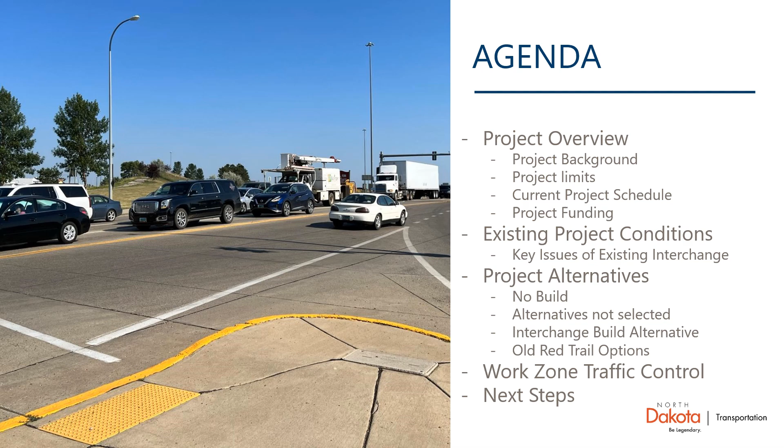Jason will then provide an overview of the alternatives for the interchange and the options for the intersection at Old Red Trail. This will be followed by a discussion of the work zone traffic control, which will highlight the impacts anticipated during construction. We will then conclude the presentation with discussion on next steps for the project and some information on how you can provide feedback and ask questions about the project. Now, beginning with the project overview.

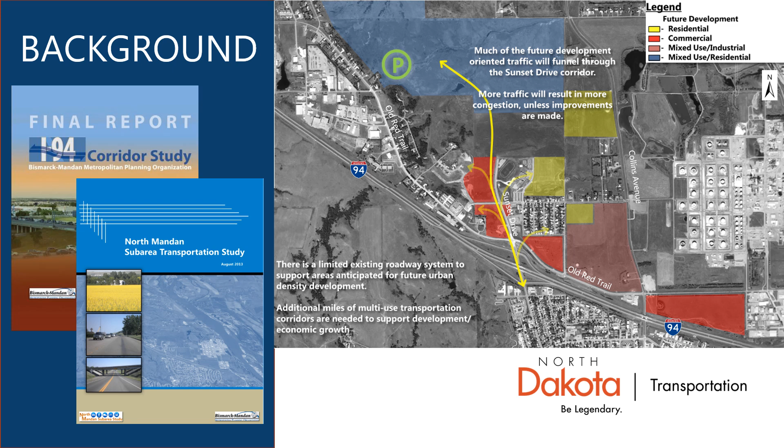Studies for this project began in 2013, when the Bismarck-Mandan Metropolitan Planning Organization completed a study of the area north of Interstate 94 in Mandan. The study found that a significant portion of new growth in Mandan would occur north of the Sunset Drive Interchange. The new growth would generate a large volume of new traffic that would funnel through the existing interchange. The report identified that modifications to the interchange would be needed within the next 5 to 15 years from when the study was completed to accommodate this new growth of traffic.

Now fast forward to the present. There has been quite a bit of growth along Sunset Drive and Old Red Trail, including a number of businesses. These include the Comfort Inn, the Medical Plaza, and the Walmart, just to name a few. Recently, the new Mandan High School has opened, creating more traffic in the area. There have also been several other developments reviewed by the city, both commercial and residential in nature, that will have an impact on the amount of traffic traveling through the interchange and how current users travel through the interchange day to day to reach these new destinations. It is this increase in traffic that contributes to the need for the project as identified in the original study.

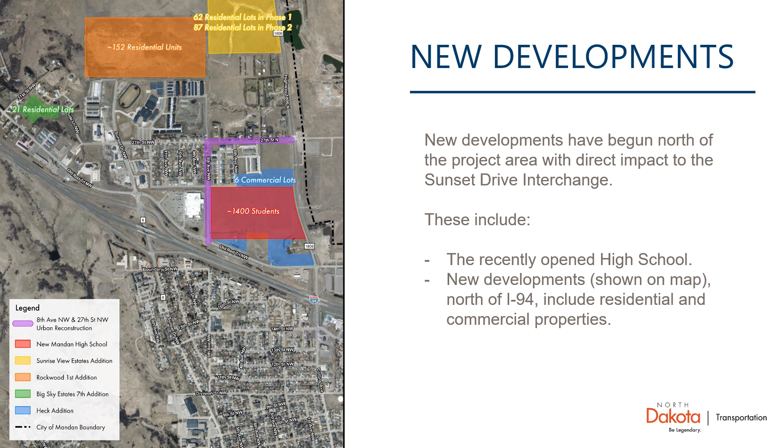The project limits for the project include Interstate 94, about 1 mile east and west of Sunset Drive. This starts at the scenic overlook along eastbound 94 located west of Sunset Drive and continues easterly to Highway 1806, the Collins Avenue overpass east of Sunset Drive. Along Sunset Drive itself, the project limits begin at 18th Street south of the interchange and continue north to the 27th Street intersection near the high school. The project will include the intersections of Boundary Street and Old Red Trail.

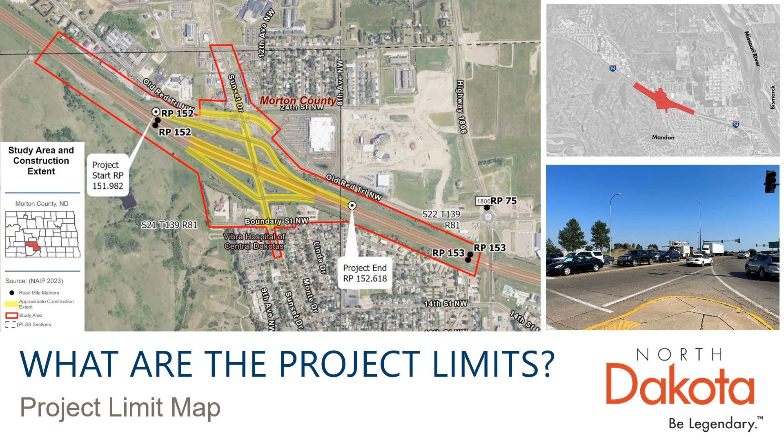Taking a look at the project schedule, we met a little over a year ago to present alternatives for the interchange. Following that meeting, the team prepared the findings of the feasibility study and held a management presentation with the North Dakota Department of Transportation and the City of Mandan in May of 2023. After the meeting, an interchange type was selected with input from the DOT and the city, and the two intersection options at Old Red Trail were both advanced for further evaluation. We are here with our second public input meeting to get more input from the public on those intersection alternatives.

After the comment period for the meeting closes, we will be reviewing the public input, making refinements to those intersection alternatives, and completing the environmental document with the selection of the intersection type at Old Red Trail. The design team will then complete preliminary engineering and move into final engineering, which will run through 2025. Utility relocations may begin ahead of construction, and construction of the interchange could begin in 2027 at the earliest.

The project funding will be split for this project. For construction that falls within state and federal right-of-way, which encompasses the interstate and interchange, the project cost will be split as 90% federal and 10% state. This covers the construction cost on Interstate 94, including the bridges over Sunset Drive, the ramps connecting Sunset Drive to the interstate, and the ramp intersections themselves. This also covers the portion of Sunset Drive within the interchange.

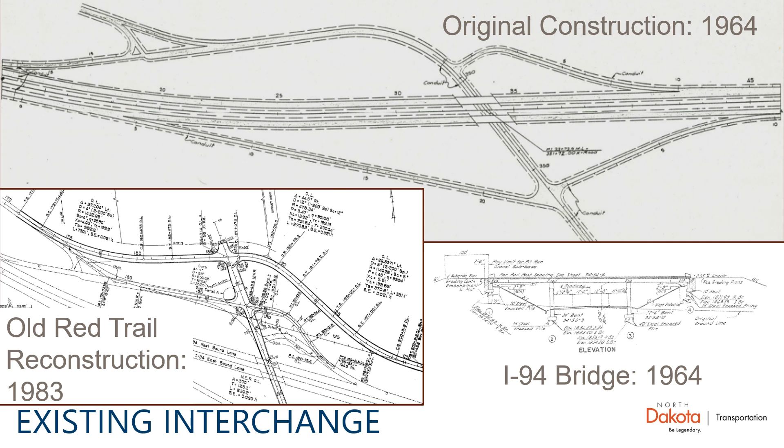Also, as the area grew, there were a number of multimodal options added to the interchange to serve the residents of Mandan. Bis-Man Transit provides bus service via the Purple Route, which enters the project area along Old Red Trail, connecting with Sunset Drive, running through the interchange, and continuing south to downtown Mandan.

There is a trail network on the east side of Sunset Drive and along the south side of Old Red Trail, which is operated by the City of Mandan Parks and Recreation Department. The trail serves bicyclists and pedestrians through the interchange between Old Red Trail and Boundary Street. Also, working in conjunction with this trail, the City of Mandan has several sidewalk facilities north and south of the interchange to provide pedestrians a connection between the residential areas south of the interchange to the businesses north of the interchange.

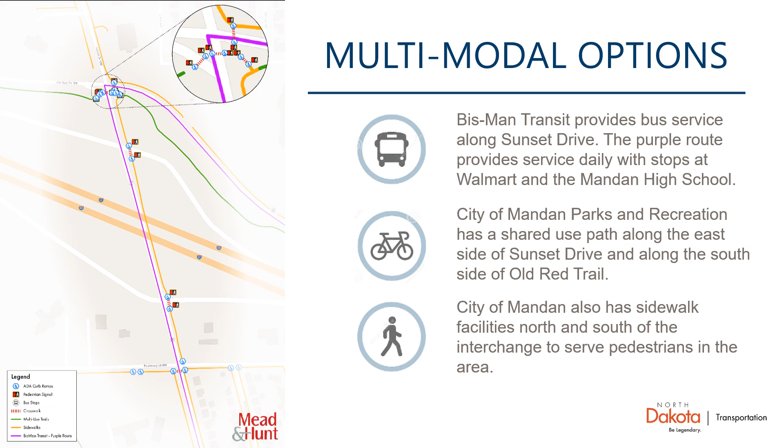Taking a little closer look at a few of the key issues of the existing interchange, I'd like to start with traffic operations. First, I need to take a quick pause to explain level of service. Level of service is a letter designation that corresponds to a certain range of roadway operating conditions. The level of service range is from A to F, and like any grading system, an A indicates the best or free flow operating conditions, while an F, on the other end, indicates the worst or congested and failing operating conditions. The North Dakota Department of Transportation guidance is to meet or exceed an overall level of service D under a 20-year projected automobile traffic.

Under the existing conditions in our study area, the signalized intersections currently are operating at an overall level of service C or better during the AM and PM peak hours, with several approaches operating at a level of service D. The eastbound approach to the two-way stop-controlled intersection at Boundary Street operated at a level of service F during the peak hour.

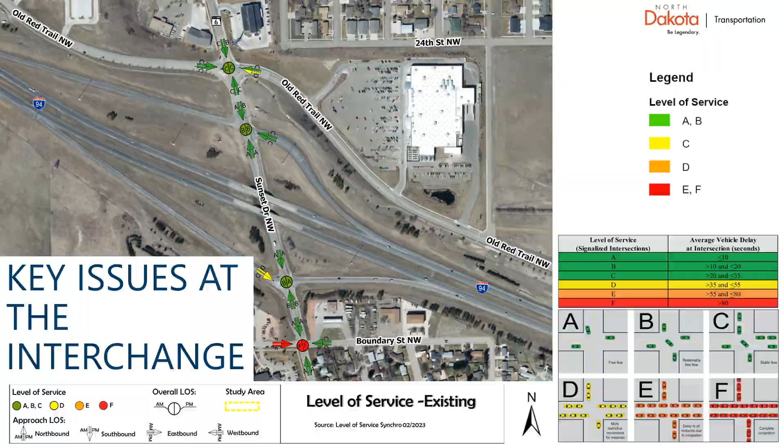Another key issue considers the safety of the existing roadway. Crash data was collected for the study area for the period from 2017 to 2022. During that time, there were 95 reported crashes along Sunset Drive between Boundary Street and Old Red Trail, with the highest density of the crashes occurring at the Sunset Drive Old Red Trail intersection. This pattern is consistent with a separate 2020 study of 65 intersections in the Bismarck-Mandan area that found the Old Red Trail and Sunset Drive intersection to be one of the highest crash locations in the area.

The majority of the crashes were rear-end type collisions, which can be associated with the signal control and increasing congestion in the area. Another significant issue, as the pictures show, is the low clearance of the bridges carrying I-94 over Sunset Drive. There have been several crashes involving trucks striking the I-94 bridge. The low clearance is significant since it requires trucks to travel longer on the local network. For example, trucks traveling east on Old Red Trail need to continue along that route to Mandan Avenue, past the new high school and the sport complexes, rather than having a direct route to eastbound 94 at the Sunset Drive interchange.

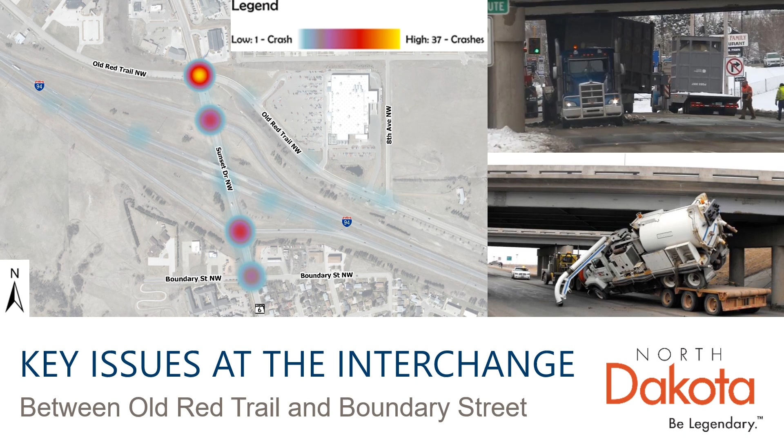Now I'd like to turn the presentation over to Jason to cover the alternatives for the project. The base alternative that we start with on any project is the no-build option. This option would keep the interchange in the current configuration. While this would have the lowest initial costs and would initially be less impactful environmentally, the 60-year-old pavement and bridges Chris mentioned would continue to deteriorate with the increasing traffic as the area continues to grow. As traffic increases, operations will continue to fail, resulting in increases in delay and longer queues, impacting the safety of the corridor by increasing the potential for crashes. The bridge's vertical clearance beneath Interstate 94 will continue to be substandard and limit mobility of trucks along the corridor.

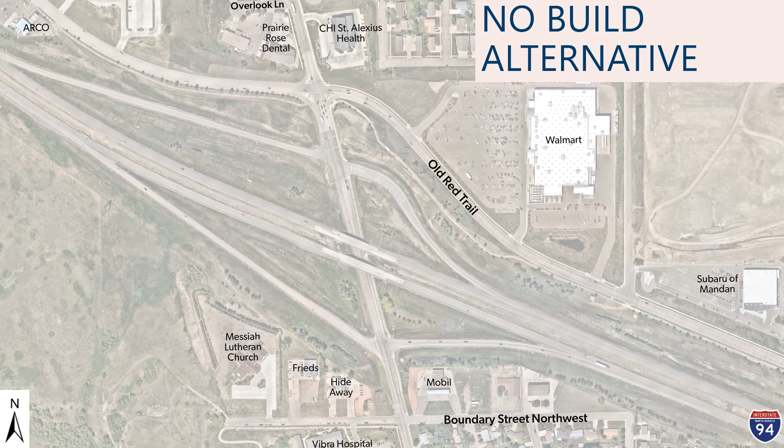Chris shared the current traffic levels of service with you earlier, as we look to the future years of 2030, the opening year, and 2045, the design year. Looking at the no-build option in 2030, the signalized intersections continue operating at an overall level of service C or better in the AM and PM peak hours, with several approaches operating at a level of service D. However, the eastbound and westbound approach at the two-way stop-controlled intersection at Boundary Street operates at a level of service F.

In 2045, operations begin to deteriorate. Multiple intersections operate at a level of service E or F during the peak hours, with several failing, impacting Sunset Drive and the connecting roadways. These results show the need to accommodate future growth in the corridor, necessitating continued improvements to the interchange and adjacent intersections.

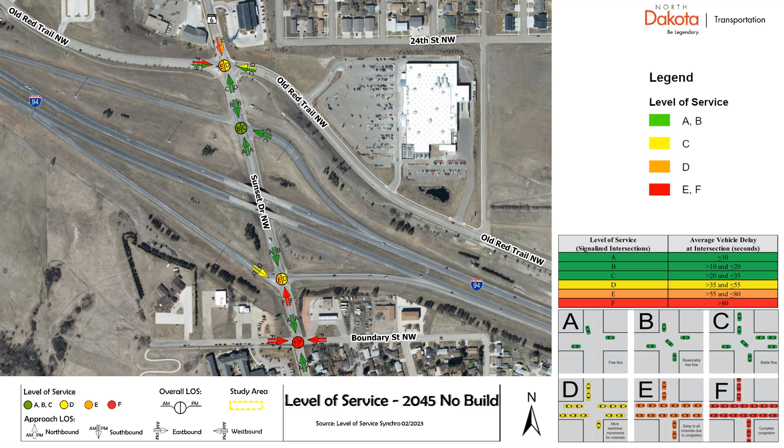Chris mentioned that alternatives were developed in 2023. These alternatives that were reviewed but not selected included a diverging diamond interchange, a partial cloverleaf interchange, and a diamond interchange with roundabouts at each intersection. The diverging diamond and partial cloverleaf alternative included looking at roundabouts and signalized intersection options at Old Red Trail and Boundary Street.

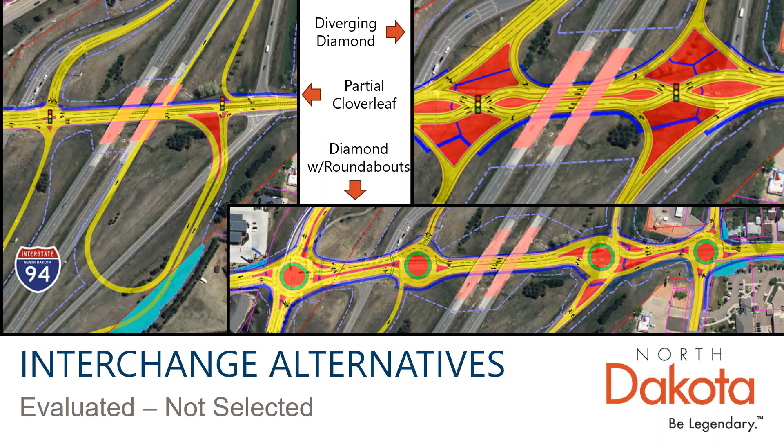The fourth option reviewed and selected to move forward as the preferred build alternative was a single point urban interchange, or SPUI for short. This interchange type combines all the ramp movements to a single intersection beneath the Interstate 94 bridges, controlled by one traffic signal.

We'll be raising Interstate 94 and lowering Sunset Drive to increase the vertical clearance at the bridges. The ramps connecting to Sunset Drive are moved closer to the interstate, increasing the spacing between the SPUI intersection and the intersections at Old Red Trail and Boundary Street. This will allow for more room for vehicles queuing at these intersections. It will also allow for more distance to change lanes between these intersections.

Chris mentioned the existing trail on the east side of the interchange. We're proposing to relocate the 10-foot trail to the west side of the interchange, so the trail crosses the ramps carrying a lower traffic volume, reducing the interaction between the trail users and vehicles. We are also proposing to place a sidewalk on the east side of the interchange.

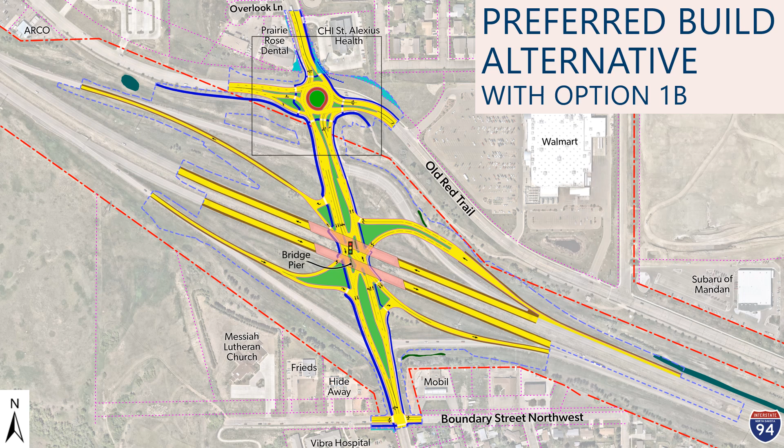For both option 1A and 1B, a signalized intersection will be constructed at Boundary Street. A roundabout option was evaluated here, but not selected. This layout will add left turn lanes at the intersection and update the sidewalks and trail crossings.

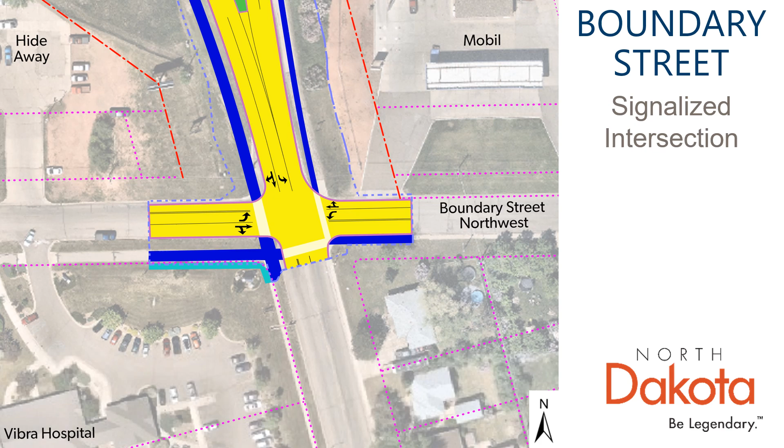Diving into the features of the two Old Red Trail options, option 1A is the signalized option. It features additional lanes through the intersection. The two notable locations are the dual right turn lanes from eastbound Old Red Trail to southbound Sunset Drive, and two northbound lanes through the intersection. The two northbound lanes will be carried north to 24th Street, where the right lane will become a right turn only onto 24th Street at the middle school.

In the northwest quadrant, the sidewalk will be connected to the intersection and crosswalks will be provided along all four approaches of the intersection. A retaining wall will be built in the northeast quadrant next to St. Alexius Health to support the additional lane and trail.

Looking at alternative 1 with option 1A, the total right-of-way impact is 0.106 acres of permanent right-of-way and 0.088 acres of additional temporary impact to construct the interchange. The total cost to construct the interchange with option 1A is $46.8 million.

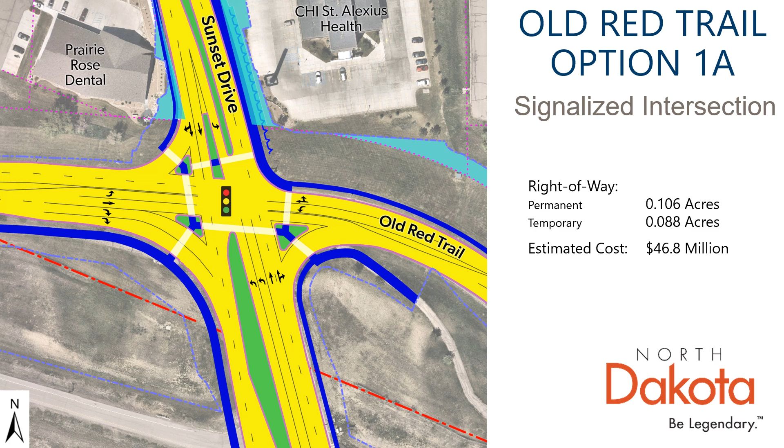Option 1B is the roundabout option. This is a dual-lane roundabout to maintain the heavy turning movement from northbound Sunset Drive to westbound Old Red Trail. Similar to option 1A, the sidewalk in the northwest quadrant will be connected to the intersection and crosswalks will be provided along all four approaches of the intersection. A retaining wall is still required in the northeast quadrant next to St. Alexius Health to support the additional lane and trail.

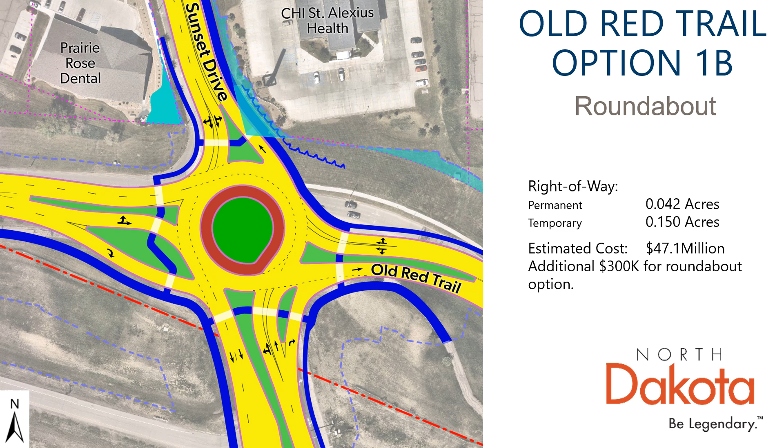Looking at alternative 1 with option 1B, the total right-of-way impact is 0.042 acres of permanent right-of-way and 0.150 acres of additional temporary impact to construct the interchange. The total cost to construct the interchange with option 1B is $47.1 million, approximately $300,000 more than option 1A in initial construction costs.

Now to cover the traffic control during construction and the anticipated impacts to traffic and pedestrians during construction. We are anticipating multiple years of construction to replace the interchange. We are maintaining traffic through the work zone, including pedestrian traffic when possible. The following slides will highlight the major areas of work for each construction season and the impacts users can expect during construction.

The construction will begin with constructing crossovers in the median of Interstate 94 to carry 94 traffic during construction. There would also be pavement widenings required along Old Red Trail and Sunset Drive to carry traffic during later phases of construction, and a temporary bypass will be constructed to connect Old Red Trail to the existing I-94 westbound on-ramp to allow traffic to be diverted around the existing Old Red Trail intersection.

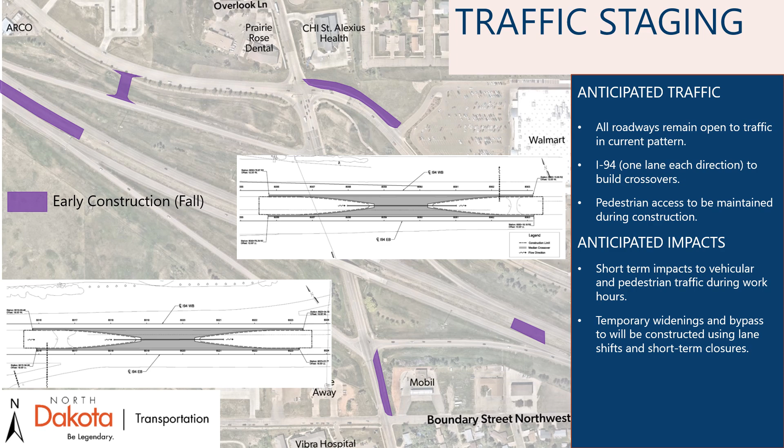During this work, traffic is anticipated to remain in the current traffic pattern, though there may be some periods of lane shifts and closures where construction is adjacent to travel lanes. Sidewalks and trails are anticipated to remain open. However, there may be periods with short delays where flaggers and escorts may be used to guide pedestrians safely through areas where construction activities are directly adjacent to sidewalks. Following this work, the project would shut down for winter months, with activities resuming in the following spring.

Beginning in spring, traffic on Interstate 94 will be shifted to the westbound roadway, one lane in each direction, allowing the contractor to remove and replace the eastbound bridge and roadway. There will be some nighttime closures required on Sunset Drive for both vehicular and pedestrian traffic to facilitate the removal of the existing bridge. Detours will be expected during those periods.

The other area of focus will be the Old Red Trail intersection. The goal is to complete the entire intersection by the fall. To accomplish this, a reroute of the Old Red Trail eastbound traffic west on Sunset Drive is necessary. We will also look to relocate the westbound access to 94 onto Old Red Trail. Even with the rerouted traffic, multiple shifts and phases will be required to complete the intersection. This applies to both signalized and roundabout options discussed earlier, regardless of which option is selected.

Pedestrians will be maintained at the intersection. However, with multiple phases, there may be shifts required in crosswalk locations to complete construction activities. There will also be areas of the new interchange outside of the existing roadways the contractor may begin work on during this construction year, mainly the new southbound portion of Sunset Drive. These areas will be away from traffic and should not impact vehicle or pedestrian traffic. Before winter, the eastbound roadway will be open and the Old Red Trail intersection will be completed with a temporary transition connecting to the existing Sunset Drive roadway.

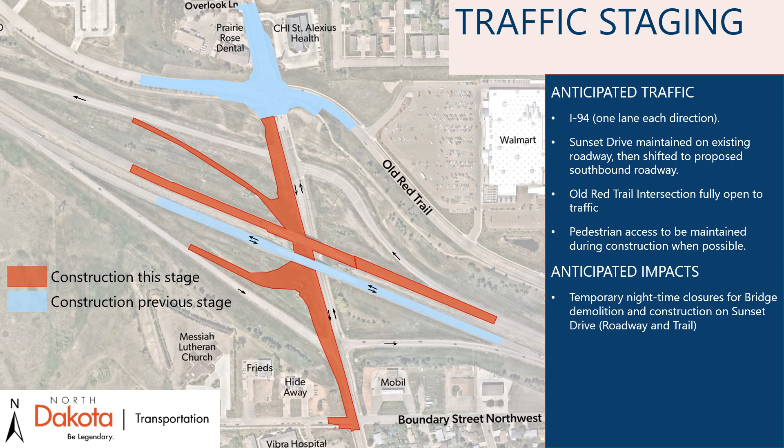Once both the existing bridges are out of the way, the contractor will work to complete the southbound portion of the Sunset Drive roadway. The contractor will complete the roadway and the new trail along the southbound roadway. During this time, traffic will remain on the existing roadway and trail. Traffic will then be shifted off the existing Sunset Drive roadway to the new southbound portion of the roadway. Likewise, pedestrians will be rerouted onto the new trail along the southbound roadway, freeing up the existing Sunset corridor to be removed. Before winter, we anticipate the westbound 94 roadway to be reopened to traffic and Sunset Drive traffic utilizing this new portion of the roadway.

The final year will focus on completing the Sunset Drive northbound roadway and the remainder of the interstate ramps shown in orange. Connections to the existing ramps will be the last work completed and will be made utilizing widenings to carry traffic onto Interstate 94. The closure of the ramps is not anticipated. Drivers should anticipate lane closures on Interstate 94 during the season to complete these ramp connections and to also remove the temporary crossovers constructed in previous phases.

Traffic on Sunset Drive will continue to use the southbound roadway during this time. Ramp traffic will then be shifted to the new intersection under the bridge in conjunction with the completion of the ramp connections. The contractor will then begin the removal of the existing ramps and finish up remaining work to complete the roadway prior to winter.

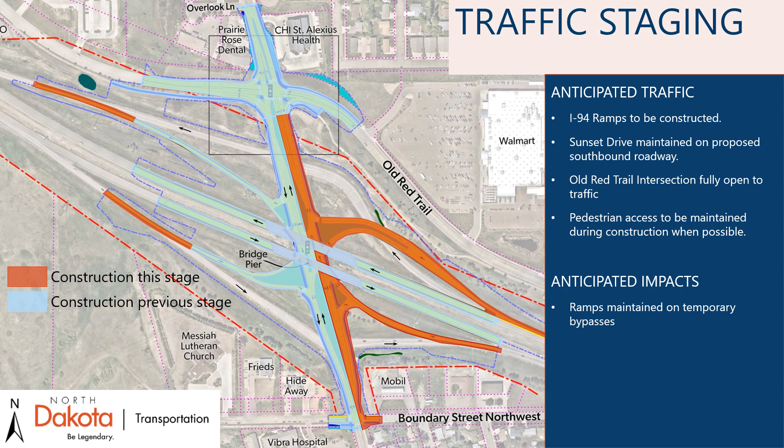Now looking at the next steps for the project, the comment period for this meeting will remain open until November 22nd. We would like your input and views on the information presented and any questions that you have about it. Please let us know what you liked or did not like about the Old Red Trail options presented here, and let us know which one you preferred.

From there, the team will be reviewing the input from the meeting and making refinements to the project design. We will be working with the Department of Transportation to rank the options and select the preferred alternative for Old Red Trail when considering the traffic operations, the safety, the environmental impacts, the construction cost, and of course the public input received on these alternatives. Following the selection of the final alternative, we will finalize the environmental document and continue through the design process.

We would like to thank you for taking time to learn more about the Sunset Drive Interchange Exit 152 project. Your feedback is very important to us. It is an opportunity for you to communicate with project design staff and relate information and ideas that may be beneficial to the designers as they work through the design process to improve this interchange. We encourage you to review the exhibits and handout materials and let us know your thoughts on this information provided today. If you have any questions or comments about the project, please reach out to us in writing or email using the contact information listed here. All comments must be emailed or postmarked by November 22nd.

Also, if you haven't done so already, please return to the project website and fill out the sign-in sheet and the North Dakota DOT Title VI Public Participation Survey, as this helps the North Dakota DOT to receive federal funding. Thank you again for your interest in this project.